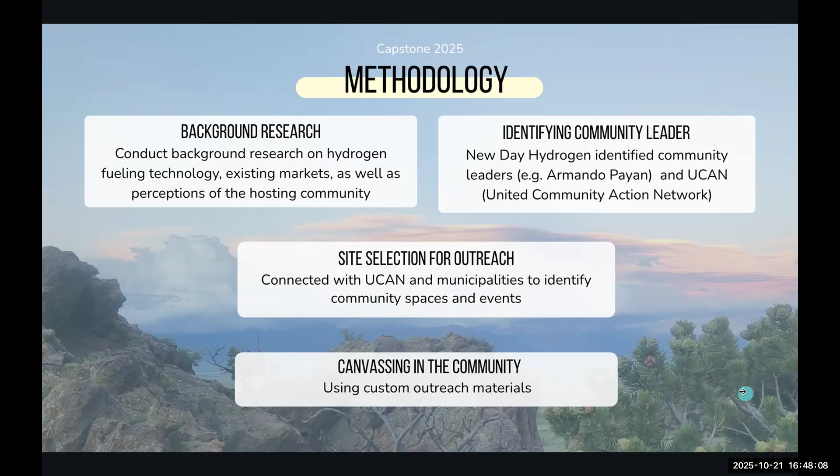Then from there, we began canvassing communities, and we did this by using custom outreach materials, which included flyers, pamphlets, and visual aids. And we introduced the residents to hydrogen fueling technology and addressed common questions and concerns that they had about safety. So to make sure that every voice was heard, we developed and distributed questionnaires both online and offline at community events, which allowed us to capture a diverse range of first-hand perspectives. And some people were enthusiastic, and some had concerns and uncertainties.

And a major milestone of this project was the public forum that we held on August 2nd. And the intention of this event was to bring residents together with industry experts and give them an opportunity to ask questions directly and learn more about the potential of hydrogen in their community. And this was the goal, but I just want to make it clear that we did not receive a large turnout for this. And this is kind of understandable as it can be challenging to get people to attend an event on a Saturday morning without too many incentives.

And finally, throughout all of this, we connected with professionals across different sectors, including technology, policy, and communications. And this helped us strengthen our understanding and ensure that our approach remained accurate, inclusive, and effective. And yeah, through these steps, we were able to build a strong foundation of community trust and gather meaningful feedback. Next, moving on to our deliverables, Cass will walk you through some of the tangible outcomes that resulted from all of these efforts.

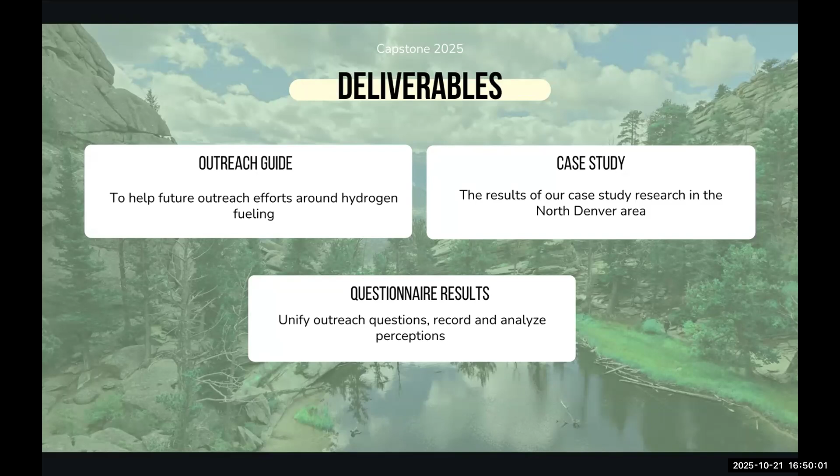Yeah, so this semester, this fall, we've been working on our deliverables that we'll be turning over to NREL, including our outreach guide and the case study specific to our time in North Denver, which will include the questionnaire results. A little bit more about the outreach guide. This guide was designed to be a broad and generic overview on how to deploy any sort of outreach related to hydrogen fueling. The idea is that this has an ability to be deployed anywhere in the country.

We discuss how to build trust with communities, connect with local leaders, and engage rather than persuade. The guide also includes templates to some of our materials, like pamphlets and coloring sheets that we designed. We also include additional ideas of more engaging materials to attract a wider range of individuals.

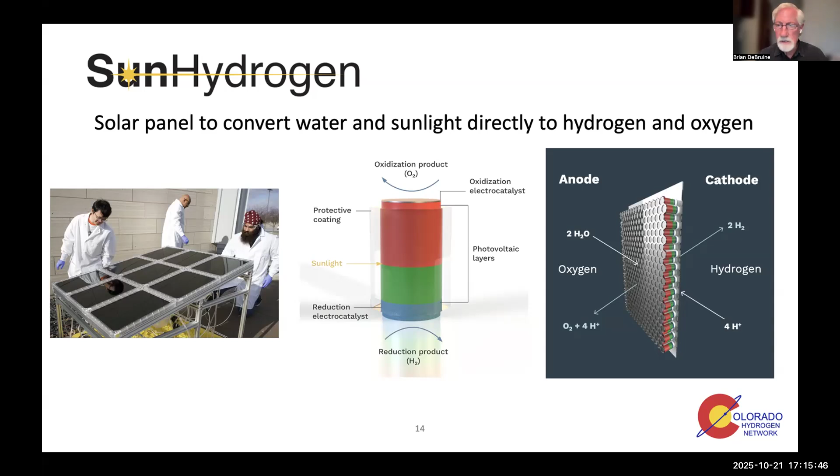So, the first thing you got to think about is, well, we've got water in this panel and you're putting the panel outside. What about freezing? Well, they've demonstrated that it works in sub-freezing temperatures. And I don't know how they do it. I haven't found that out. So I kind of leave that maybe as a question we all need to kind of puzzle about. But here's the team. Obviously, they're huddled a little bit. It looks pretty chilly there in Iowa.

But I also kind of wondered about how much land does this take? Because if you are doing this, it's kind of implied that you want to do this at the point of use. And I wondered, how efficient is it, and how could you do that? So the energy per area, basically the kilograms of hydrogen that are coming out per area, if we just do a little calculation here, the panels produce 0.01 kilograms per square meter per hour under more or less ideal sunlight conditions.

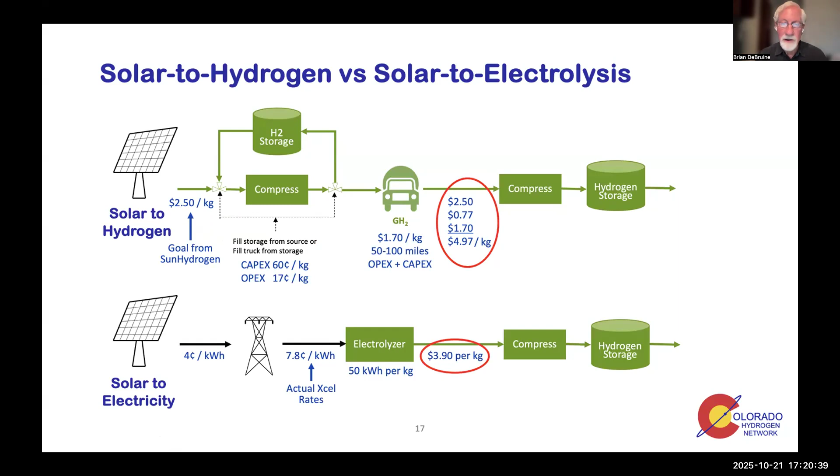All right, so let's see, what have I got next? All right, so that's probably enough said there. So as I said, I saw some news articles about batteries, basically utility scale stationary batteries, and wanted to talk about that a little bit. So the real news article that I saw was about these sodium iron pyrophosphate batteries, which I hadn't really heard too much about before. And then I already knew about the iron air batteries that are out there and wanted to compare those two with using hydrogen for energy storage. Let's do a little arm wrestle here.

Which one wins? So with the sodium iron pyrophosphate batteries, basically what those are is a type of sodium ion battery that is pretty stable, uses sodium ion or sodium as the cathode material. And it's really suitable for grid energy storage. The advantages are it's high safety, it resists thermal runaway, pretty wide operating temperature, wider certainly than lithium ion. Then it also is capable of thousands of discharge cycles, and you can take it down to zero without damage.

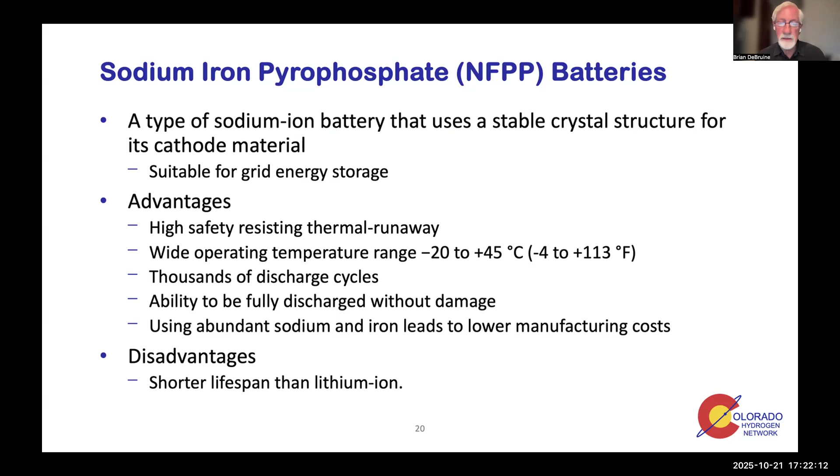As a matter of fact, one of the advantages they talk about is you can ship these batteries fully discharged, so they're a lot safer to ship. And of course, sodium and iron are pretty earth friendly, available elements, and so there's not a lot of cost with that. One of the disadvantages, though, it's got a shorter lifespan than lithium ion, so possibly an issue.

To compare that to iron air batteries, the way those work is basically around rust. Oxygen from the air reacts with iron, and that generates an electric current. And basically the iron is oxidized in a two-step process, which releases the electricity. And to charge, you basically reverse that process and you kind of regenerate the metallic iron.

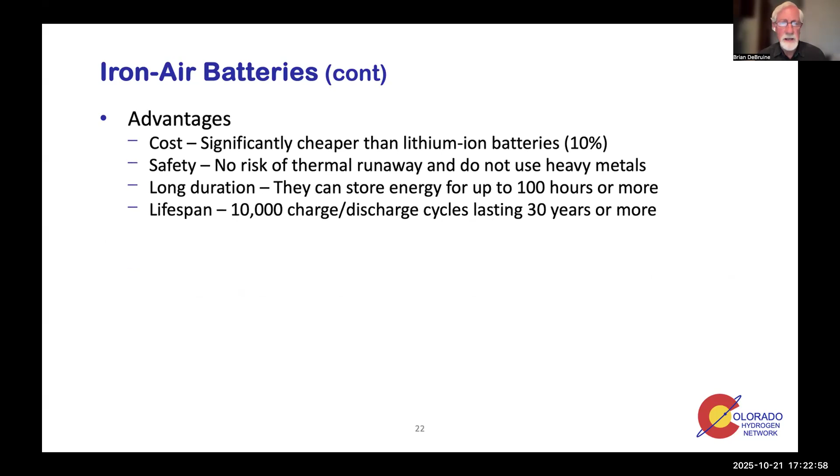So advantages to those, they're really cheap, about 10% the cost of lithium ion, no risk of thermal runaway. They can store energy a fairly long period of time, 100 hours, even more than that, and pretty long lifespan, so they might last 30 years. Disadvantage is their discharge rate.

Now, I don't know if many of you have looked at batteries, but the C rating is basically a ratio of the amount of energy you can withdraw from a battery divided by its energy content. So if you discharge it at 1 amp and it's a 1 amp hour battery, the C rating would be 1, and that's per hour basically.

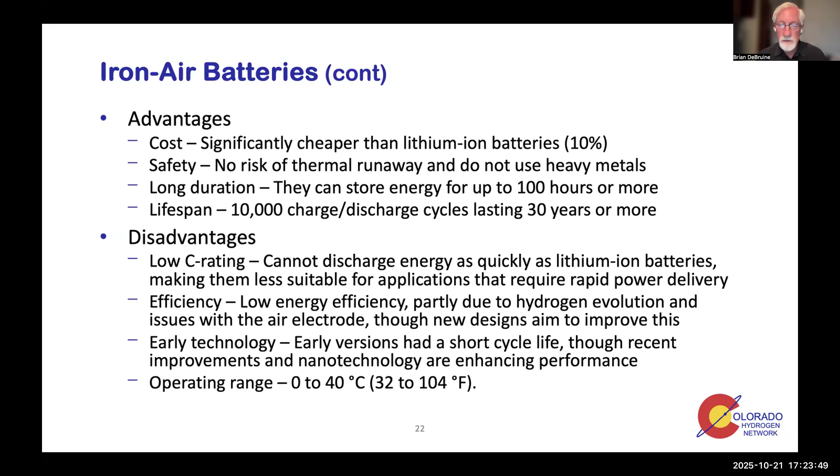And efficiency, they're kind of inefficient. I'll talk about the efficiency here in just a moment and compare that with some of the other technologies. And apparently some of the earlier versions had a short cycle life, and I think that's being improved. So operating range, not quite as broad as a sodium, but 32 degrees to 104, which probably for a stationary application is not too big a deal.

All right, so hydrogen, on the other hand, has a really wide operating temperature range, extremely long storage time. I mean, basically, it could be about forever if your tank doesn't leak. But the disadvantage is high capital cost for what I'm calling an electrolyzer fuel cell. So that would be an electrolyzer that can be reversed to be a fuel cell as well, and the compressor and the high pressure tanks.

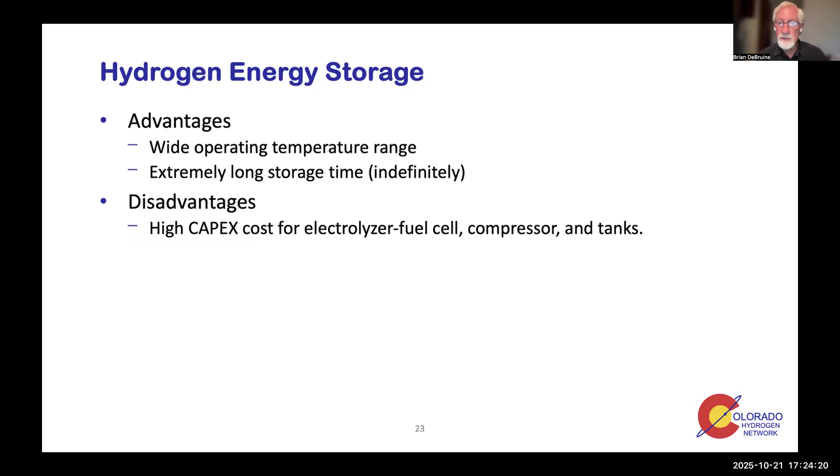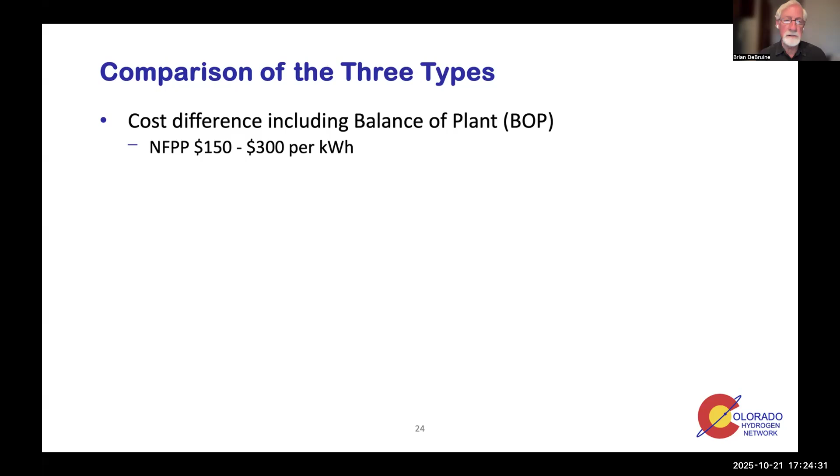All right, so to compare all three, the cost difference, including the balance of plant. So for the sodium, that's about $150 to $300 per kilowatt hour. Whoops, I got things out of whack here. Iron air is a lot cheaper. Compare that to lithium ion, all about the same as the sodium. And then hydrogen is way up there, obviously, because of the compressor and the tanks and the electrolyzer and so forth.

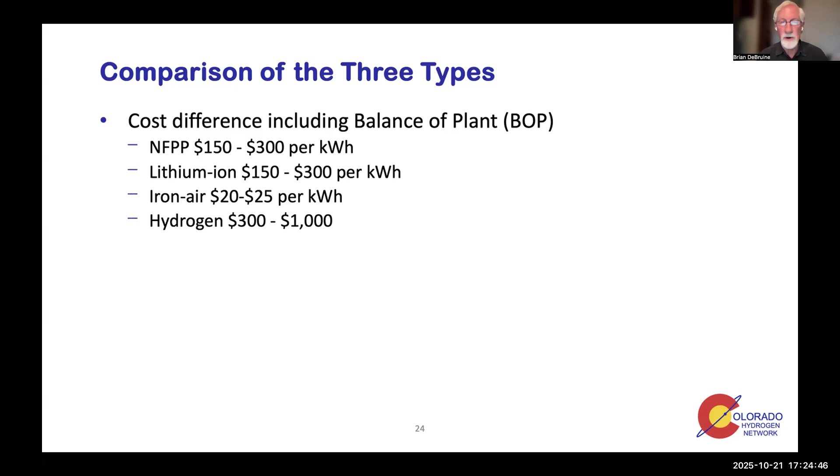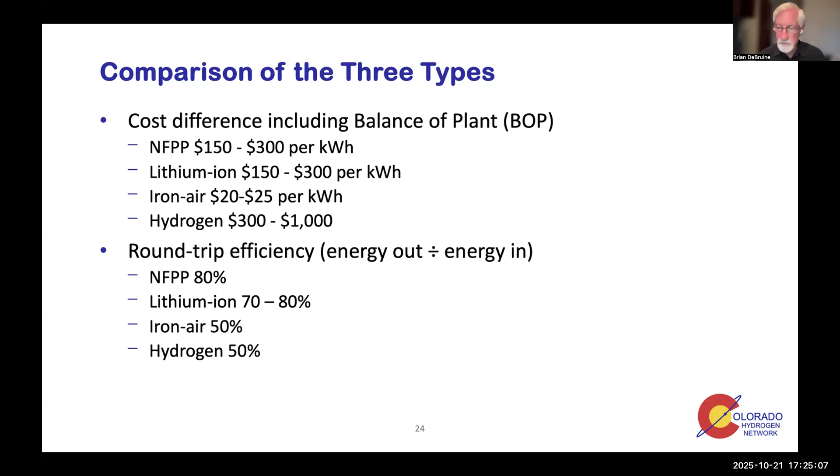So the round trip efficiency, the sodium's about 80%, lithium's probably in the same range, 70 to 80%, iron air, 50%, and hydrogen's probably about 50%. So that kind of gives us an idea where these three technologies stand in case it comes up in a conversation. You just kind of want to have a gut feel for where some of these things are.

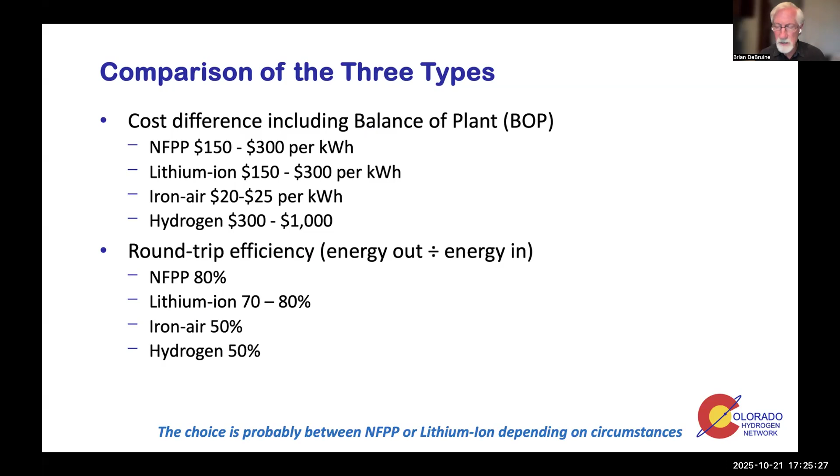So takeaway here is probably that between the sodium and the lithium ion is probably the choices. I know a lot of utilities, though, are looking at the iron air. So there may be some other extenuating circumstances that I didn't really cover here.

All right, switching gears to talk about geothermal energy. Now, this doesn't really have that much to do with hydrogen, but I think the drilling technology could. So I love this graphic. I just wanted to be able to use it, but kind of cool, just showing that basically what you're trying to do is sink a well that gets down to the hot rock that you can use for generating energy.

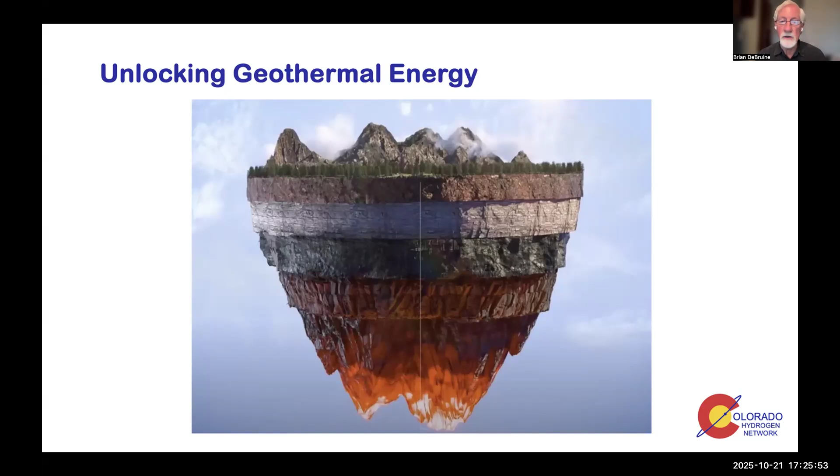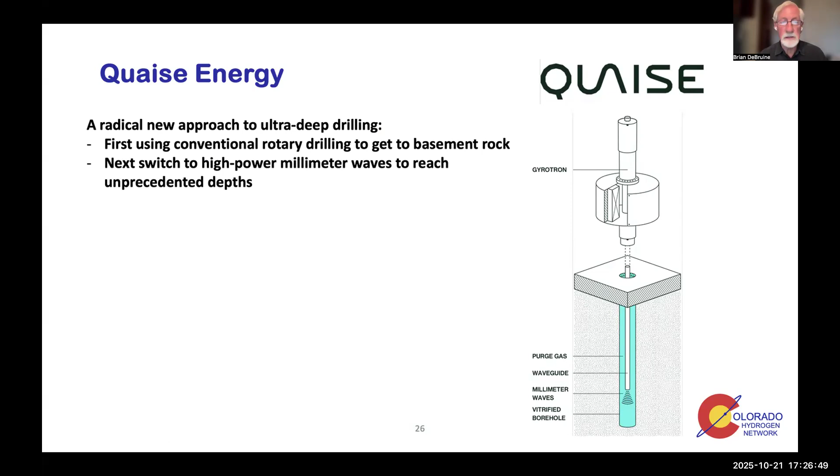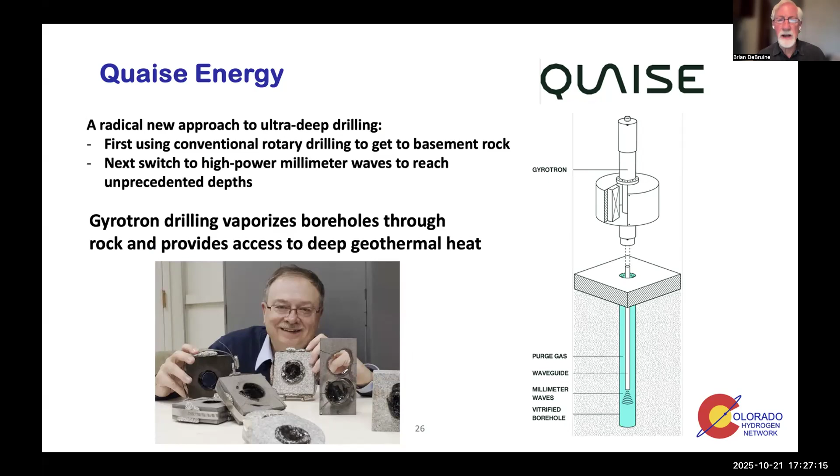I think that this could also have uses in possibly natural hydrogen drilling. I don't know. I haven't seen that specified anywhere, but it's definitely a possibility. So, like I said, there was this milestone. They had this test in Texas and showed the ability to drill 387 feet. I don't know if they just stopped at that point or something went wrong. It didn't say, but they considered this really kind of a milestone.